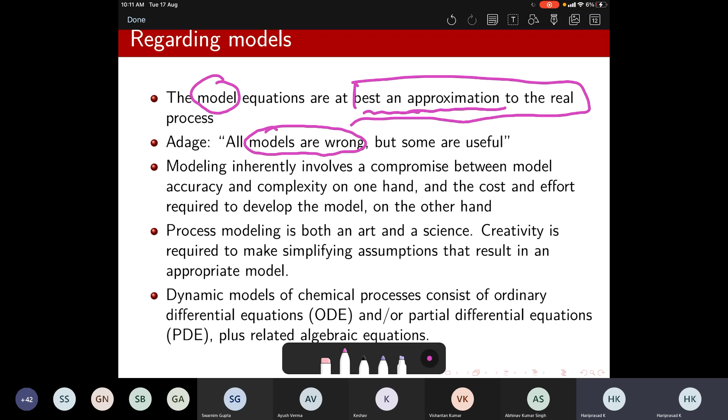And what is the problem? Model development of the model is not the key. You see that? So how does this exercise go? How does this exercise work?

So this is the real system. You would assume this is a physical plant, and there are innumerable inputs to the system, and there may be multiple subunits, multiple outputs inside. In fact, there may be many subunits. Eventually, you would tend to see it as an input and an output. So this would be your feed, technically speaking, if you use a chemical process plant, and then the output, of course, is your product.

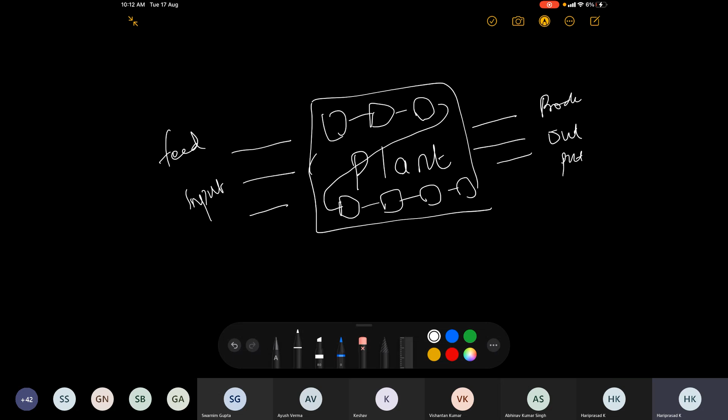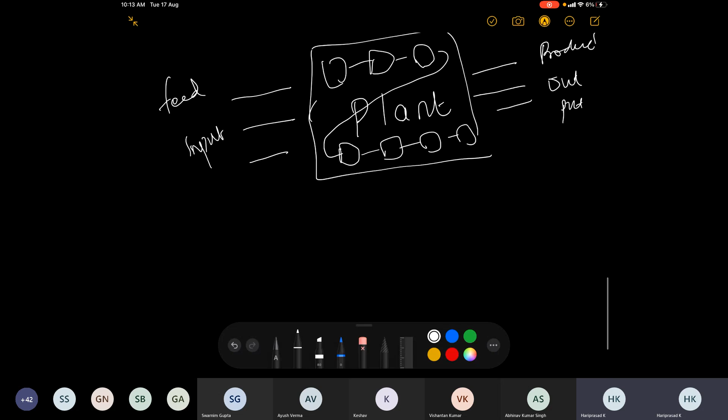So it is impossible to capture all those dynamics directly in any way. Even if you are a very good mathematical modeler, you may not be able to capture each and every intricacy associated with it. So first of all, what we need to understand with respect to a model is that it's a mathematical approximation.

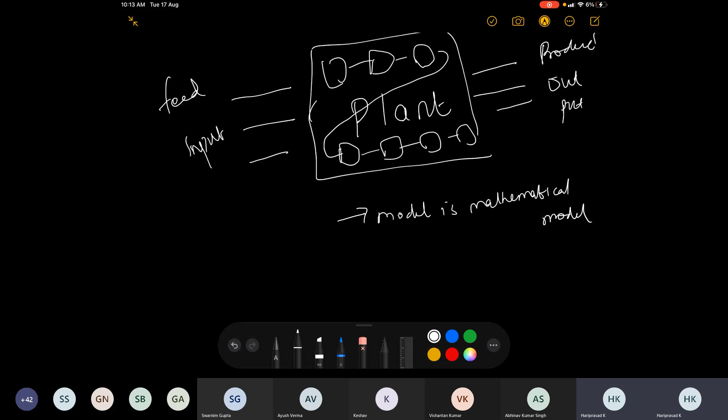So you are talking about maths, right? Mathematical models or a simulated model. Even if you see a simulator, behind every simulator you are basically solving various model equations. So what is the problem? When we do a mathematical model, there are two challenges.

One challenge is accurate modeling. How accurately can you model?

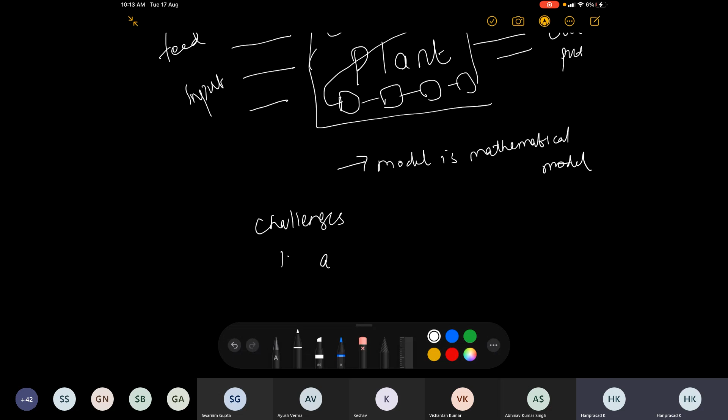Accuracy of modeling. Okay, so let's say you have a good team and you finally were able to model the system very accurately. The second challenge is you have to solve them. The solution of modeling won't give you anything, right?

Solution of your model is the problem. So what is the problem? Your models are basically talking about dynamics, right? So essentially you are not talking about algebraic equations alone. If it is just algebraic equations alone, then it's a steady state problem and it's much easier to solve.

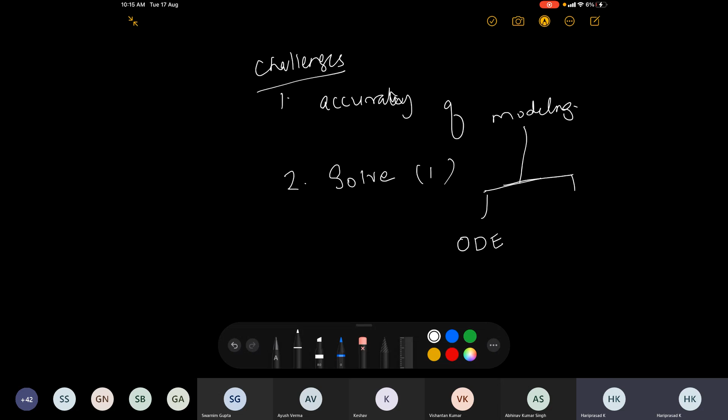So when we start looking at a dynamical model, it could be ordinary differential equations, partial differential equations, many, so vector, tensor, and so on and so forth. So solving, you have learned about numerical methods course. There are various aspects of it.

You have to solve them, see, your decisions, as we are looking for, you have to take a decision in a second. Your decision making in a second. So you need every information regarding how the dynamics works probably within seconds, or let's say a few seconds.

So let's say if in a second, maybe if you find that to be too much an overburden concern, it could be some few seconds. So will you be able to solve these ordinary differential equations or partial differential equations in such a short time? Because eventually speaking, they are all computationally complex.

Then there are other aspects that come in. Most of the ODEs, ordinary differential equations, and partial differential equations, are solved numerically. So there is no explicit solution. I hope you understand the difference between explicit solution and numerical solution.

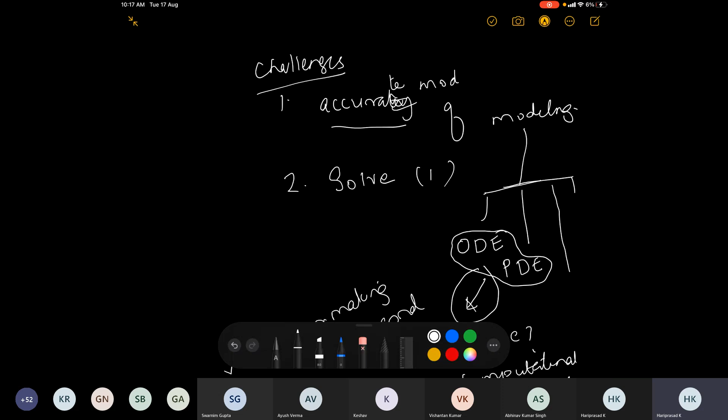So eventually speaking, the challenge is not only in developing an accurate model, let me correct it, accurate modeling. So let's say even if you succeed in developing a good model, your problem is to solve them in a fraction of a second to get all this information. So all of this is a matter of huge concern.

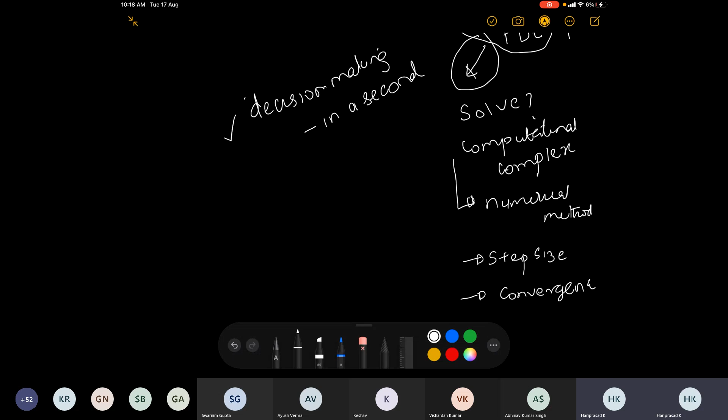So this is what we are trying to say. And let me also say something. The most important aspect is the assumption that you bring in. This assumption should be, see, modeling is a toy game. You can do anything and everything in the computer. So you can have an assumption saying that, eventually, it's all up to you what you do. You can also take a very unrealistic assumption to make a model.

It would give you a model, but are they valid in real life? So that's a big problem. Whatever assumptions you consider, for instance, most of the things, reaction, you assume equilibrium conversion and things like that. This may not be the case in reality. If you don't assume that, the result you are going to get may be categorically different to whatever you have initially assumed. So this assumption plays a key role.

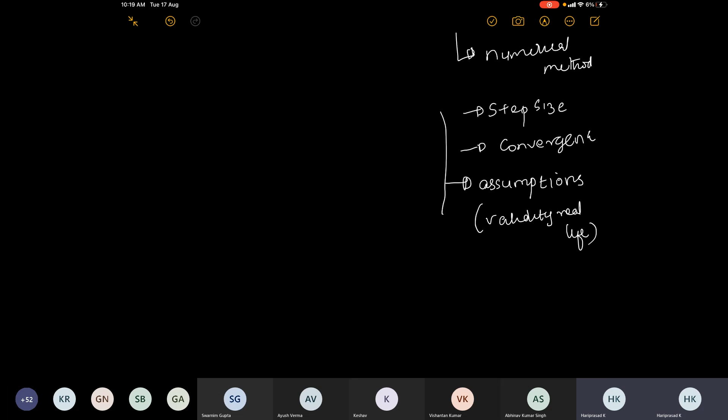And of course, it's an art. The problem is, there are three conflicting factors: accuracy, so the more accurate you make it, the more likely that your model will be more complex. And the third aspect is computational, computational related problem.

So see, it's like this, right? If you are making a model more accurate, that eventually means you are making the model more complex, and you increase the computational demand. Because this is what we need, to make a decision in maybe a second or a couple of seconds, because you need a faster solution.

Okay, so let's say go the reverse. You made it computationally very easy. The model complexity will be less. Okay, then you're compromising on accuracy. So this is a vicious circle, this will keep on happening. So as an engineer or a domain expert, it's up to you to trade off between all of this. It's technically a trade-off.

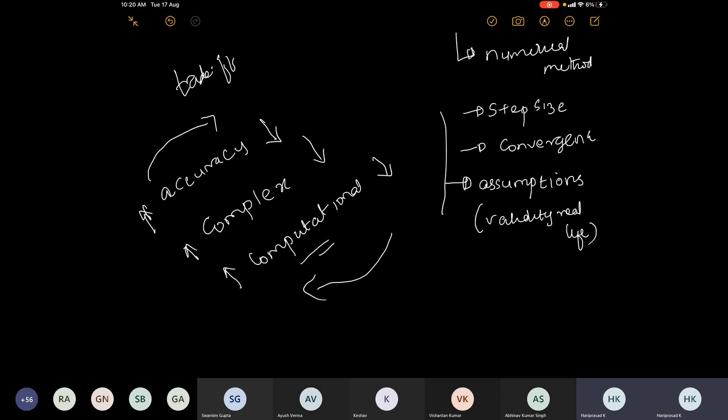Okay, so now coming back to whatever I am trying to say, let me also talk about something else. There are three classes of models. One is called physics-based model. It is also called first principles based.

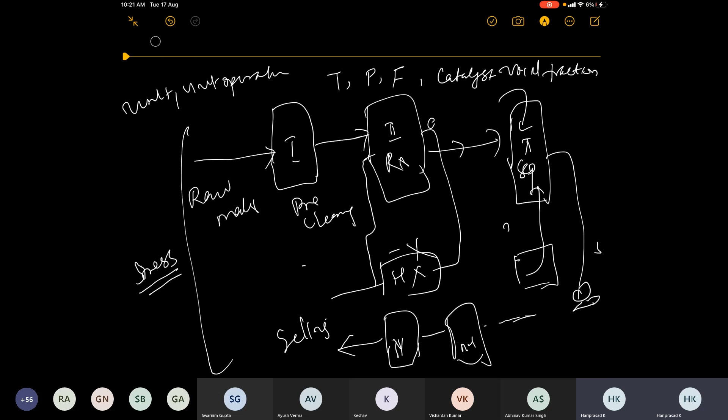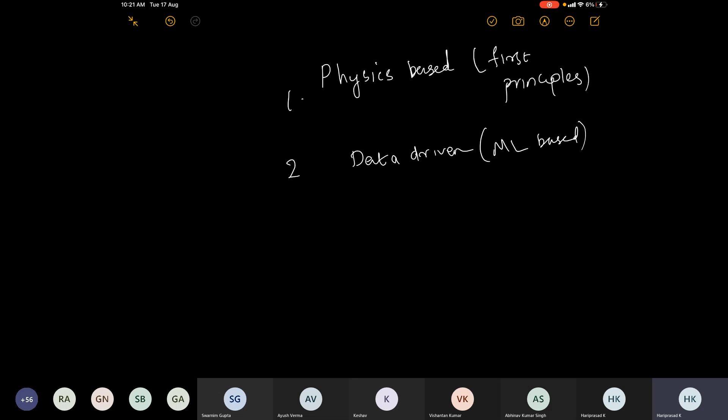The second approach is fully data driven. This is basically the ML, or machine learning, or whatever you would like to call it. The third is a sweet spot between one and two, called the gray box model. It's a combination of one and two.

Data-driven models are also called black box models because you don't worry about physics when doing data-driven modeling. Your aim is only to make things work. So machine learning or data-driven based models don't care about the underlying physics, because your aim is just to model the data, which is expected to carry the most information of the process. You're not worried about whether your data follows physics and so on.

So what you gain here, it would have more generalizability because it's mostly coming from physics. But again, the difficulty here is that it is tedious, so whatever I told previously would affect that. While here, this is faster and maybe more feasible, because you only have to look at the data, and you use whatever you develop as a model based on the data. The problem here is it may not be generalizable because it lacks physics, but you could do something to make it work.

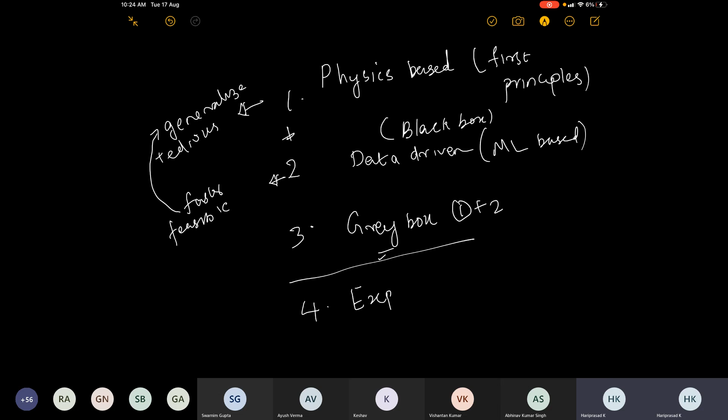Now there's something coming up known as explainable AI. Of course, these are all classical, textbook methods. Here too, the problem that a machine learning based or data-driven model has is the lack of generalizability. You may not be able to derive any insight out of it. You'll be able to use it for your application, and it would work, but if you need to gain insight regarding how two variables are co-varying and so on, that information is very difficult to extract.

Due to the advent of renewed interest, people were not looking at data-driven modeling in great extent previously, but now a lot of people are working in this area. So now there's a push to have what is known as explainable AI-based models. You can forget about the physics for some time and ask: can I extract or retain some of the information from the data itself that satisfies the physics? These are basically called explainable AI.

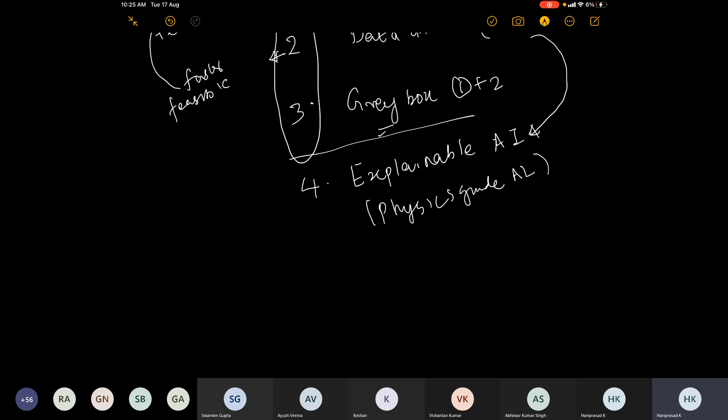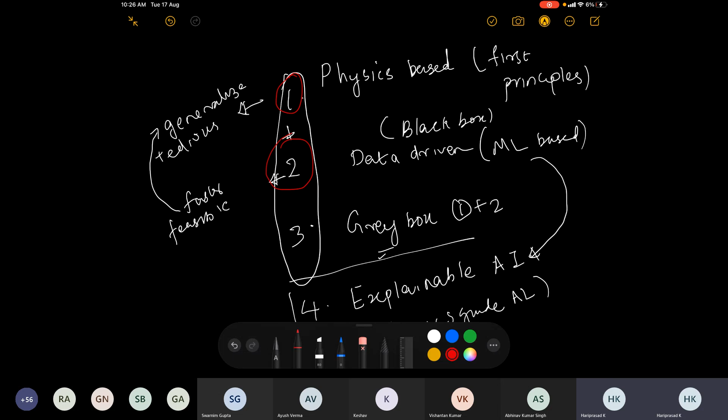Then, of course, this progression comes in. If you have A and B, it's not very difficult to combine A and B to make an A plus B, while this last one is standalone, completely new.

Any questions here? Any questions before we move on? Hello, any questions? No, sir. If you have any issues, feel free to stop me.

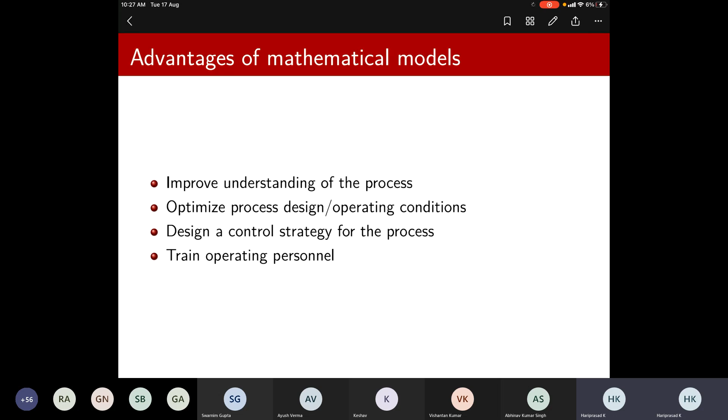Of course, this content is not concentrated into quantitative analysis, more qualitative. But if you find anything not clear, please feel free to stop me.

If you have a model, there are multiple advantages. You'll be able to use them to understand the process, because you can simulate and see what is happening. These two are our interest. Of course, optimizing the process design and operating condition is part of advanced process control.

So this is basically advanced process control kind of a thing. Designing the control strategy is directly coming under our ambit. It is basically proper process control.

Okay, so the third is training the personnel. This has nothing to do with any other thing. So let's say if you are joining new in an industry, you will be able to understand how things work there, right? So you will be able to train them by playing with the models.

So basically, they are simulators. You heard about flight simulators, how it works. Let's say an aircraft you need to fly, or even just start flying, you should be proficient in terms of the flight simulator. So if you are good enough in simulators, then you are ready to do hands-on.

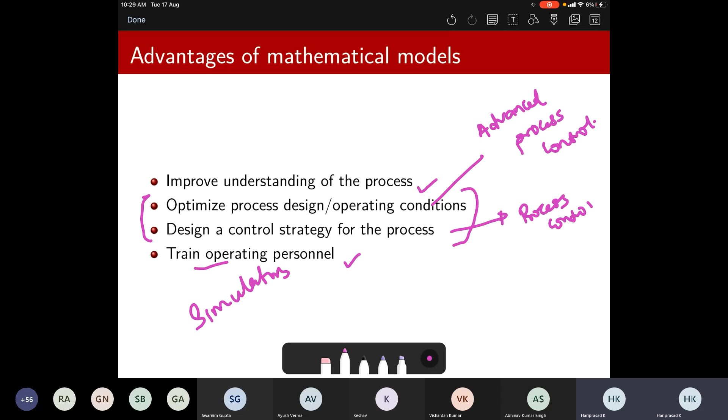So the same thing works in training the operating personnel. Once you are comfortable with how the simulators work, which is expected to mimic the original process to the best extent, then you will be able to go do your hands-on.

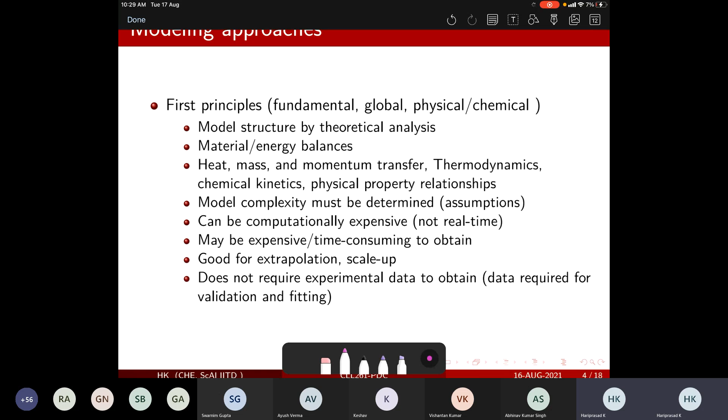Okay, so many of the things on the slide I have already mentioned, right? So the major category of this modeling approach is first, like oldest, I would say, first principle. There are various names like fundamental, physics-based, chemical. Basically, first principle means that you have used the physical understanding of the process.

So the simplest first principle model that you all know is for material and energy balance. It satisfies the physics. If you want to add finer detail into the system, then you would add heat, mass, and momentum transfer, and if needed, thermodynamics. So till now we are only talking about the physical system.

Then, let's say if there is a reaction happening, you add chemical kinetics, and so on and so forth.

So the problem is, you see, look at where we started. You initially had material energy balance, then you had the transport details, then you added the thermodynamics, then you added the chemical reaction, then property relations. So it will become enormously complex when you progressively add them.

You see, let's say this, if I call this as one. Now this is all of it, I'd like to call it transport. Then you add thermodynamics, then you add the reaction engineering to it, and then you add the physical property relationship.

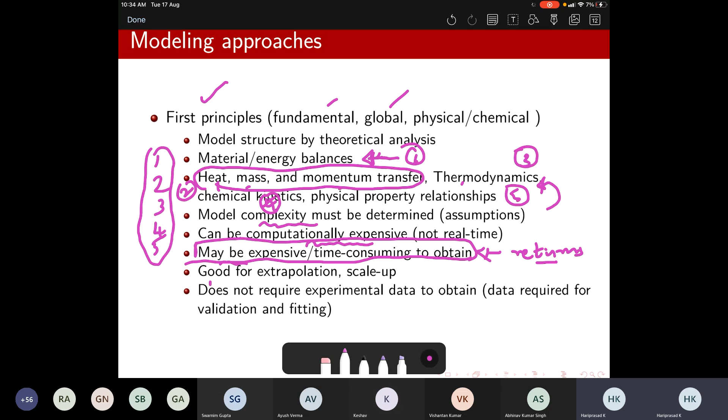So this is a big problem. First principle models are mostly expensive and time consuming to obtain. But of course there are real good advantages, they are good for extrapolation, scale up, and so on.

Because this is fully physics based, and as I told, physics is fundamental. If it is correct, it is correct forever, there is no confusion. If you could capture the physics well, for instance the law of gravitation, of course there are improvised versions like relativity theory, but gravitational theory is fundamental. There is no issue because it fully obeys the physics, even though it is a very old thing. So once you develop it, it is fundamentally correct and it is going to serve forever. But how you need to do that is the question.

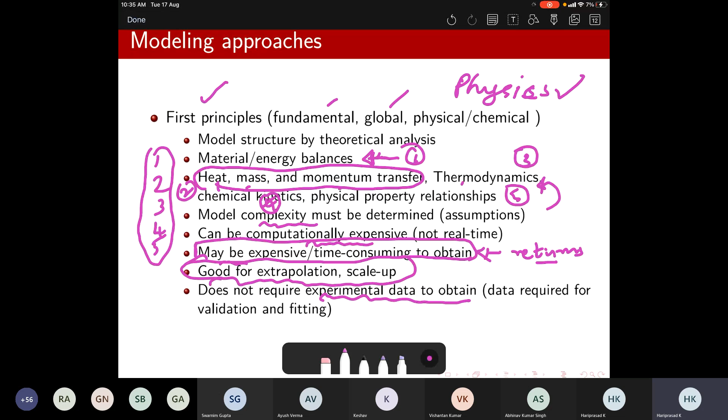It also requires no experimental data, because you are doing it from the physics. So physics technically does not require laboratory scale experiments. You are deriving the assumptions, writing the balance, assuming various things, and so on.

Another aspect is the black box or empirical model. I also add machine learning based models here, they're all the same. Eventually what you are trying to do is fit a model, basically fitting a model. Of course, the model structure is predefined, be it linear regression, you know what the structure of linear regression is, you only need to fine tune the parameters. Be it a neural network, everything, the model structure is prefixed, and what you do is fit the data into this prefixed model.

That's why it is quick, because your model structure is fixed. Your effort is only fitting, or if you want a more refined word, training a model. Since the structure is fixed, you only need to train it.

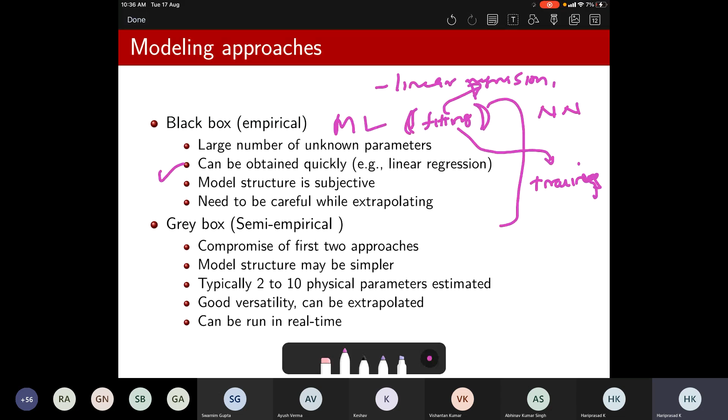As I told, model structure selection is subjective in the sense that it's like a shelf, you will have lots of models available. It may be linear regression, it may be neural network, it may be support vectors, it may be decision trees, and so on. So as a modeler, you have to go and pick, okay this is my pick, and then let me do the training. So it is a bit subjective, but that's fine, it makes things work.

So the major issue in this case is extrapolation. It is all designed or developed from data, so data is the evidence. Let's say you train your model with the data, but if you have not seen a certain data anytime, your model also doesn't know that such data exists, and the model also won't know the behavior of the system when it operates in that condition.

So the key aspect in black box or empirical modeling is representative data. Representative in the sense that you have to believe that your data history is good enough to support your overall operational range, that you don't have anything hidden, you have everything in the data. That's the hypothesis. Unless you have that, if you have a very narrow operating range and you would like to develop a global model, it's going to be difficult.

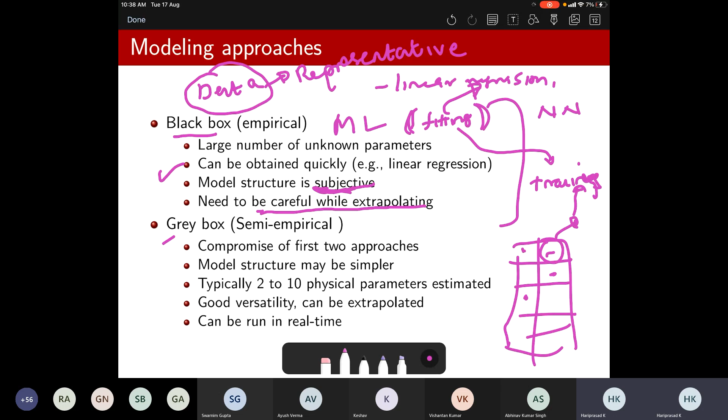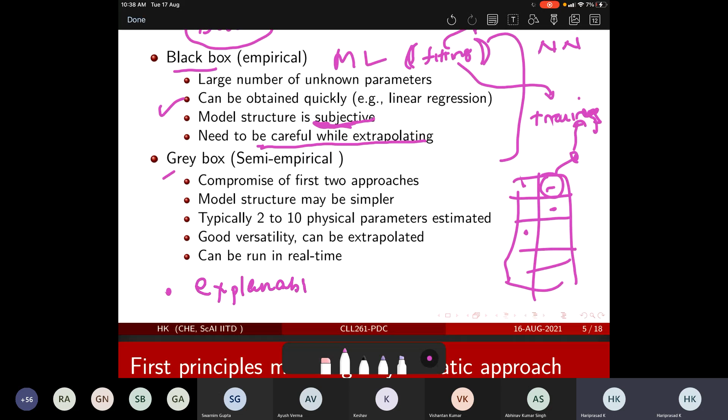So the other one is gray box or semi-empirical model. As I told, it's a sweet spot in between. Some part of that would be physics based, and some part would be machine learning or data driven based, and so on. For large scale, of course I did not add it here, because it's not there in the text, that's why I did not add it. But of course there are also explainable AI kind of models.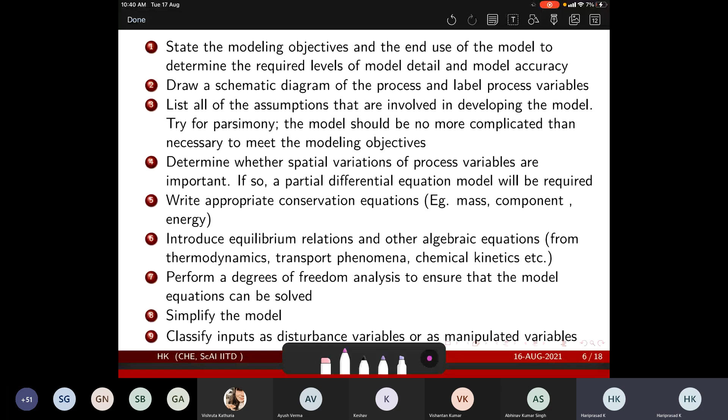This is our plan. What are the steps that we need to look for? We'll have to state the modeling objective, which variable you need to model, and what is the level of detail, the accuracy and objective. This has to be decided a priori, because you can do one thing in many different ways.

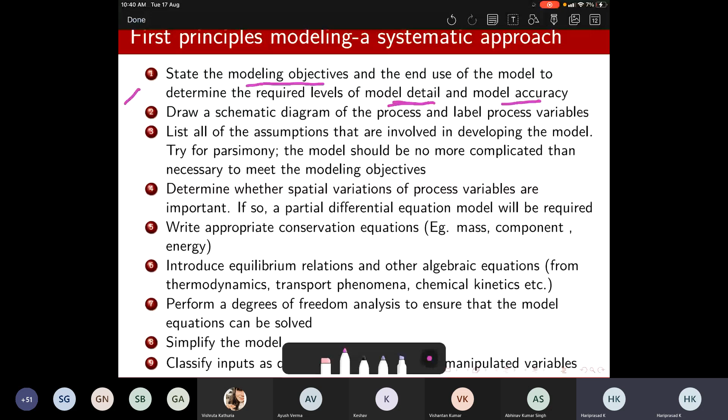A good way, a very nice way, is to have a schematic. Write down the assumptions. Try to have parsimony, which means trying to have something very simple rather than complicated, because that could have an impact either in the modeling phase or in the solution phase, so on and so forth.

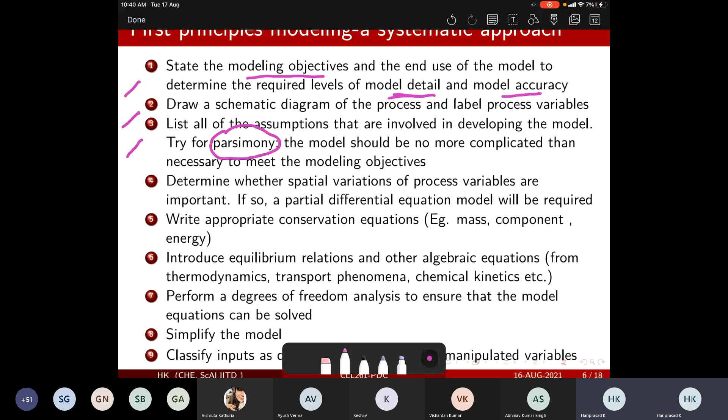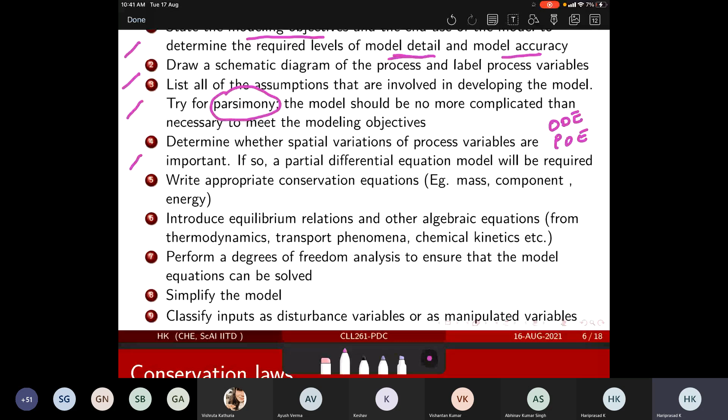So if you check for spatial variation versus temporal variation, that would give rise to whether you need to have an ODE or PDE. So you need to look for the conservation equation, that would bring in sometimes an equilibrium relationship in thermodynamics, which would bring in an algebraic equation.

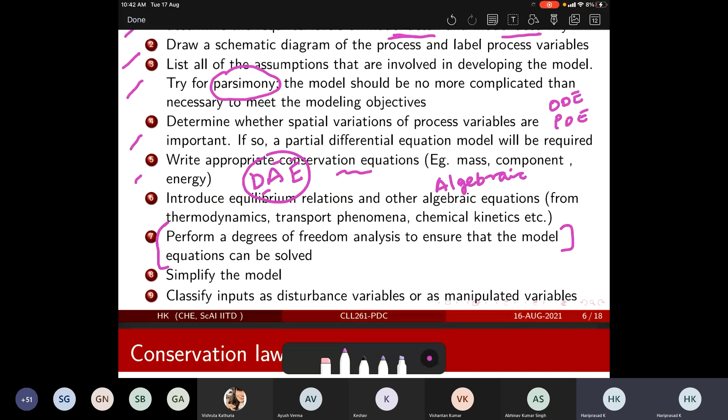Once you've done this, you have to check the degree of freedom analysis, whether you will be able to solve it or not. Then, is there any scope of further simplification? Once this is done, you could identify the variables in the model as disturbance variables, manipulated variables. I'm not explicitly saying control variable, because that is something you know from the starting, and that is what guided the overall model development.

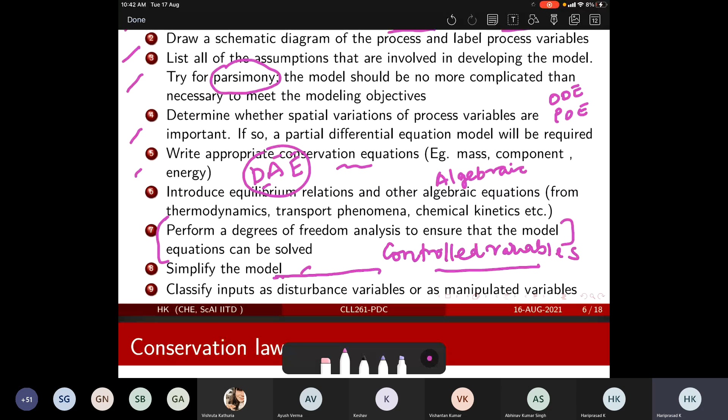So, any questions as of now? No questions?

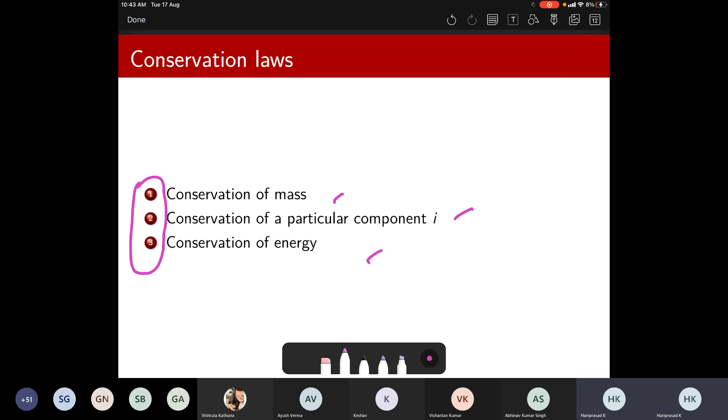Okay, so predominantly we would definitely use mass balance, component balance, and energy balance. We will be able to use at least one of these for developing our models. So conservation laws are the key, and this is something that you have done.

So let's do a recapping exercise. Consider a stirred tank heating process. You have a stirrer that rotates inside a heater, making the temperature uniform. You have a feed in and feed out.

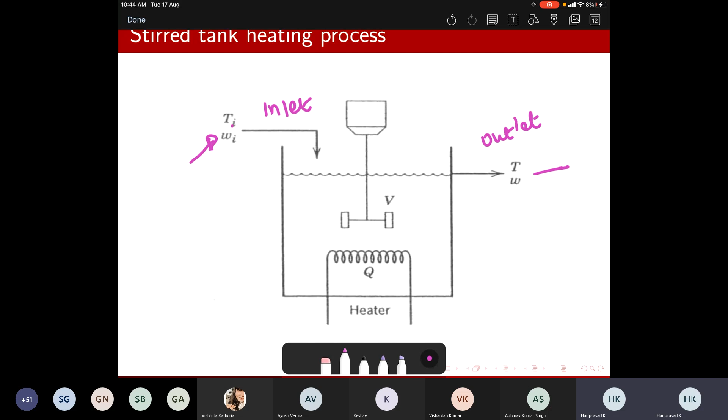Inlet temperature is marked with the subscript i. Outlet temperature is just left as is. Ti means they are all at the inlet, and this is the outlet. And you are heating it, like you have a heating coil that supplies the heat, Q, which once transferred into the fluid, the stirrer would rotate to make the heat uniform.

So let's say if you would like to develop a model of how the temperature profile behaves, and before we go ahead, let's say you wanted to control the temperature. So we have to list out the objectives. You want to control the temperature of this tank.

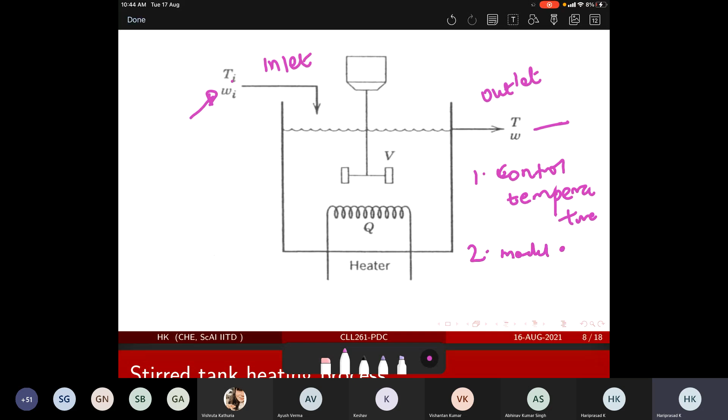So then we go back. If you need to do the control, you need to know how the temperature varies with respect to time. So we should know the model of temperature as a function of time. You see, that is what we are doing here, correct?

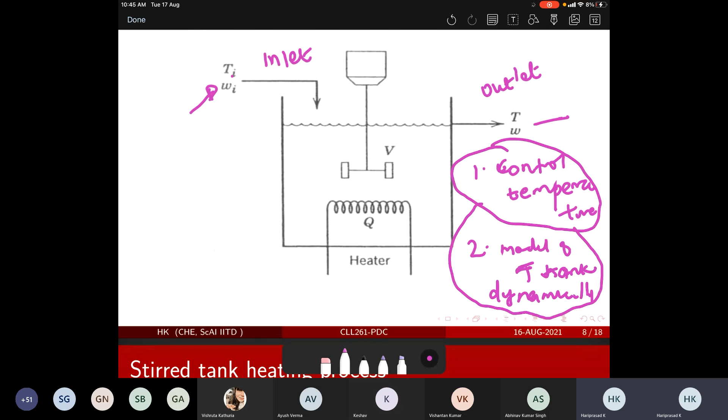So you are trying to model the temperature of the tank, which is T, dynamically, which means with respect to time. So your overall control objective now dictates what to do. That's why I told you, once you have to control the temperature of the tank, that gives you the controlled variable. Then you will be able to develop a modeling objective associated with it. So then you need to know how it is varying with respect to time, and now you will come back and try to model this.

Some assumptions that you always make: you probably need to assume perfect mixing, holdup is constant, and assume the inlet and outlet flow rates are equal, density and heat capacity are constant, and there are minimal heat losses.

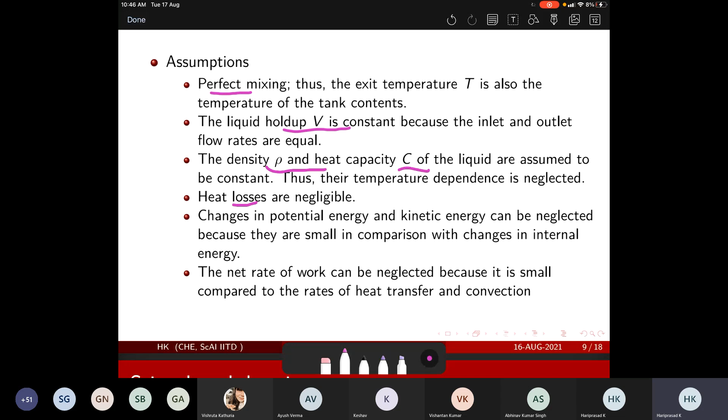Okay, so there is some work happening. See, you are using a stirrer, it is rotating inside. So what is the total energy? Assuming that the changes in potential and kinetic energy can be neglected, because the heat energy change is much higher than that.

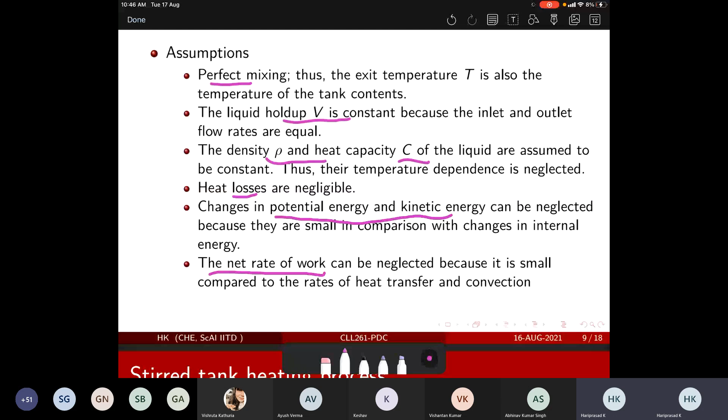And also the net rate of work can be neglected because of the heat transfer and convection. So the rotation of the stirrer might not be generating enough work that can be converted as corresponding heat energy into the system.

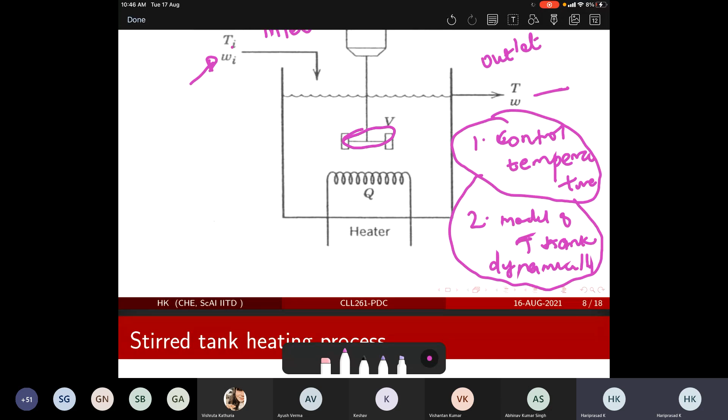So these are some reasonable assumptions. If you need to remove one, you are free to remove one. If you need to add more, you are free to add one. So basically what I'm trying to say is for us to fix this.

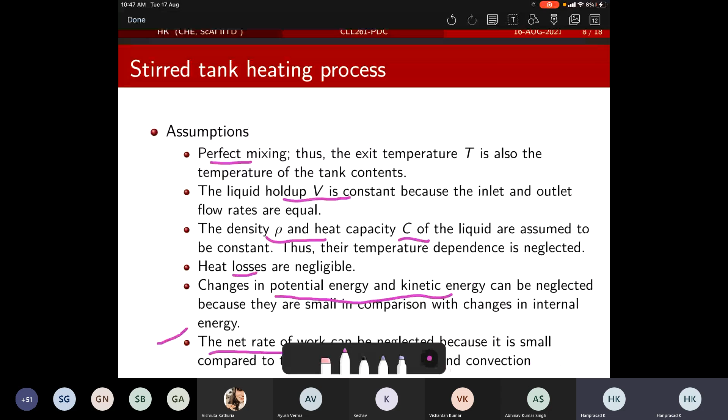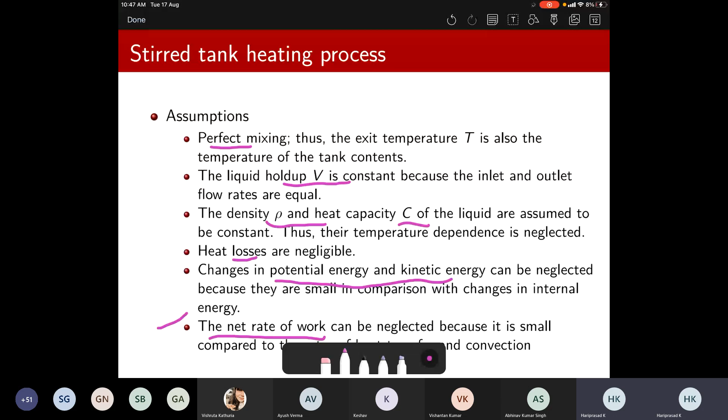So let's say you have an objective now: control the outlet temperature of the reactor or tank. Then you came up to the fact that for this I need to develop a model. Then I went back one step ahead and say that before developing the model, because we are doing a first principles based model...

Because there is no sensor. So if you need to develop a data-driven model, you need to have a lot of stored data, because data history is something that would help you develop this model. And you will say there is no sensor here, so nothing is recorded. I don't have any data history. So I have only my understanding about the process, how it works.

And overall this process doesn't seem to be very complex. So investing in first principle modeling is not a bad idea, because you have only one unit and all of these operations are known to us. It's just heat transfer. So there is no harm in going with this. So this is the argument that should help us choose the first principle model.

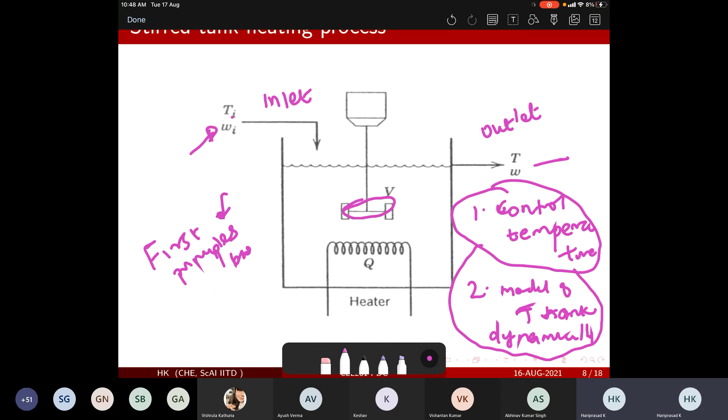So let's say you have 10 such reactors in series. Everything has nice sensors and all the data is stored, and there are multiple refluxes. One tank is connected to two, three, four. Then there is some feedback, recycle. Then you could definitely think of not doing a first principle modeling because of its complexity. And if you say I have a lot of sensors giving good data which is saved, I could also think of looking at it from a data-driven modeling perspective.

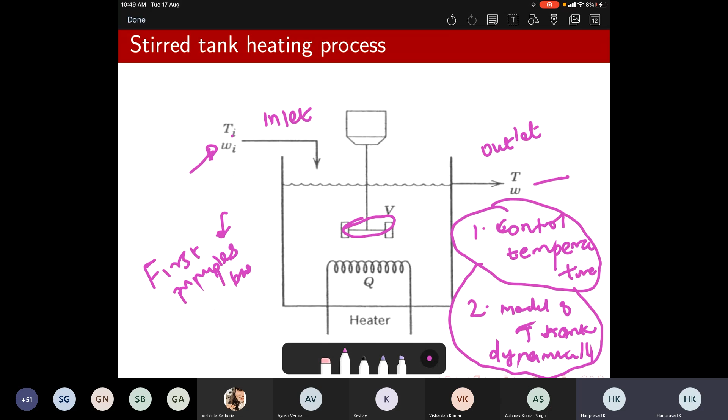So I hope this aspect of the design stage is clear to all of you. Any questions here?

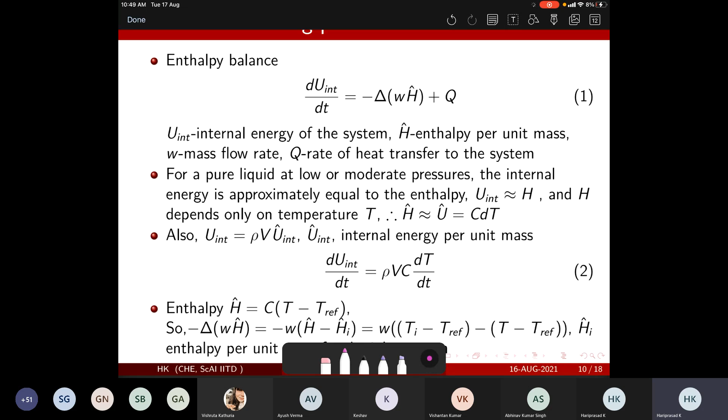Any questions? Perfect. So if you have any, please feel free to ask.

Okay, so basically you need to do a balance, right? So how do you do? Generally you do an energy balance. Let's say you are trying to do that. Eventually you have to know that you need to control the temperature. So controlling the temperature is definitely not a mass balance problem because you are adding energy. So it's an energy balance problem.

So you try to do an enthalpy balance. Change in the internal energy is equal to the rate of heat in, mass flow rate and its enthalpy per unit mass, plus heat transfer to the system.

So again, the point here is we have written a very nice enthalpy balance. Now we will see there is no temperature variable here. Eventually you need to control temperature, and there is no temperature variable in model equation 1. So what we should now try to do is use our smartness to bring in this variable inside this equation somehow. You could consider trying to see how enthalpy or heat could be connected to temperature, and so on and so forth.

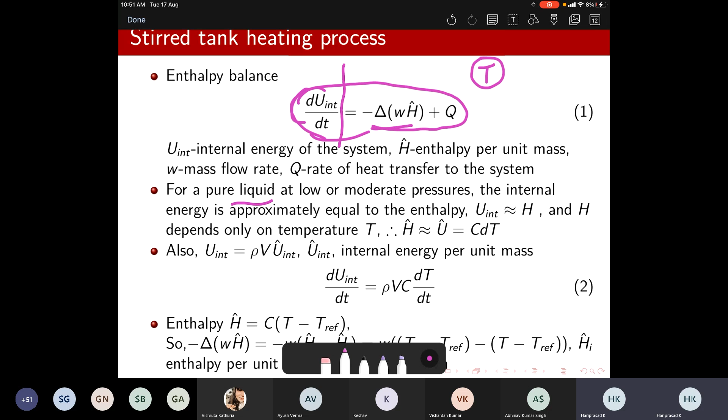Okay, so now let's take the left hand side term only. So pure liquid, this is just water assuming that, and under moderate pressure, it's an open system, there is no further pressure. Under moderate pressure, the internal energy change is equal to the enthalpy. So U, change in internal energy, is equal to enthalpy, and H of course would be equal to C dT.

So what would eventually happen is, U, what I would say is, you change it. The internal energy you can call it as rho, mass by volume, times... so basically you are talking about a specific variable, multiplied by internal energy per unit mass. If the unit is internal energy per unit mass, you will multiply. You have to multiply by mass, and because the mass is not really available, you know the density and the volume of the liquid. So dU by dt would be rho V C dT by dt.

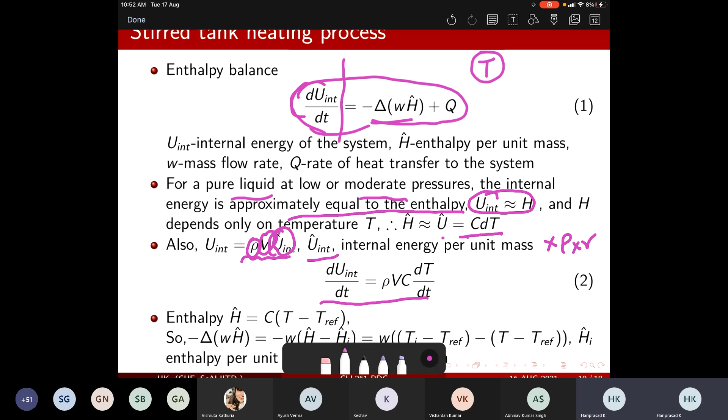Okay, so now we have broken down part 1. So now let's look at part 2 of it. H hat, C dT basically.

Then delta of wh would be equal to w times h hat minus hi. Okay, and now I'll write t minus. So it is delta, right? So delta would mean that w h hat. Okay, so I will keep this w guy out.

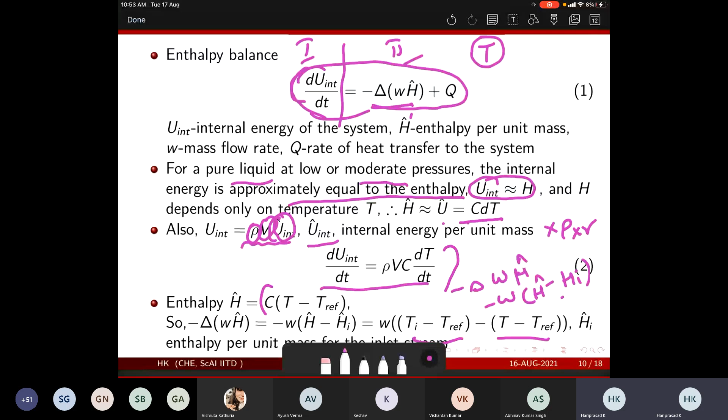Okay, so h hat minus, so it's a change, right? So it changes with respect to some reference variable, and you will have h hat minus hi, and hi you can call it ti minus t ref, and h you call it t minus t ref. So what you would really see, so now you can appreciate in equation 2 and subsequently in the last bullet, you could bring out the temperature variable in the model, which was not there in equation 1.

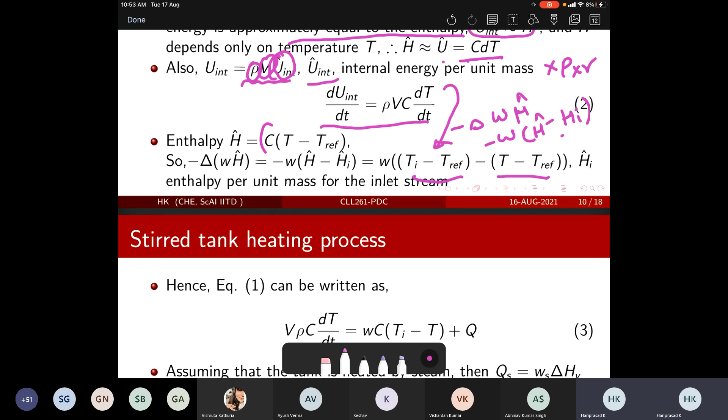Now what you could do, you can plug in over here. So left hand side would be rho Vc dt by dt. So here there's a T ref, it cancels out, WC into Ti minus T because there is a T here, and of course Q.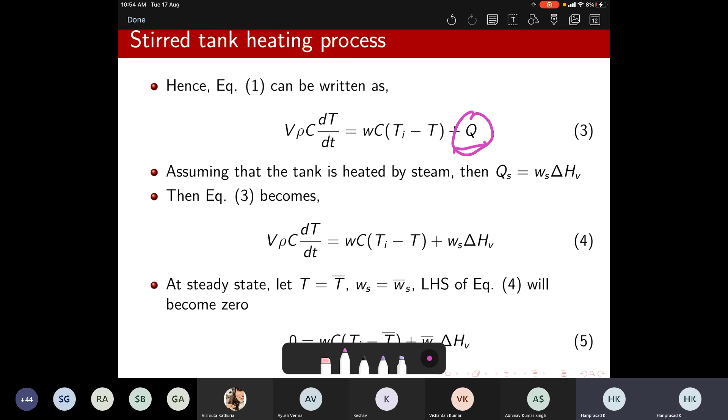Then how are you supplying heat? So the Q stands for heating, correct? So you could supply heat by a heating coil, or you could supply the heat via steam. Let's assume that we are supplying heat via steam. So then Q would be Ws times delta Hv. Then you would also add that over here.

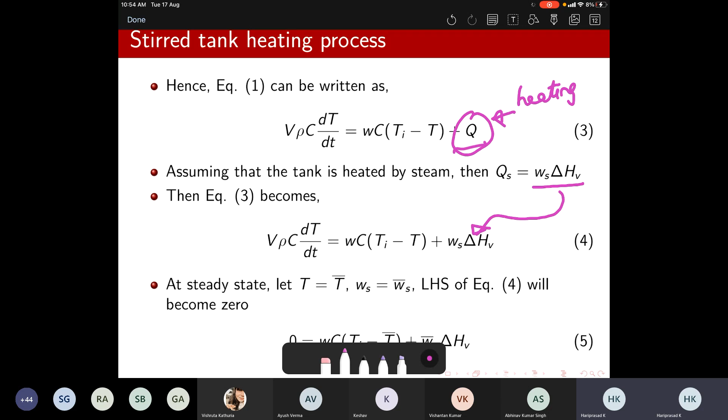So this is the dynamical model. So you see everything is varying with respect to time. It is dT by dt. Your t is a time varying variable.

And what is the steady state counterpart of it? The left hand side would be equal to 0. And assuming, let's say, t becomes a steady state t and flow becomes a steady state flow, this is the dynamical steady state equation corresponding to this dynamic equation. So equation 5 is what we generally use because that is mostly the simplest case, assuming that there is no variability in the temperature, this is how the energy balance looks like.

So this is the true energy balance considering the variability. So I will not move further. I'll stop here, and if you have any issues we can discuss. Otherwise, I will continue this in the next class.